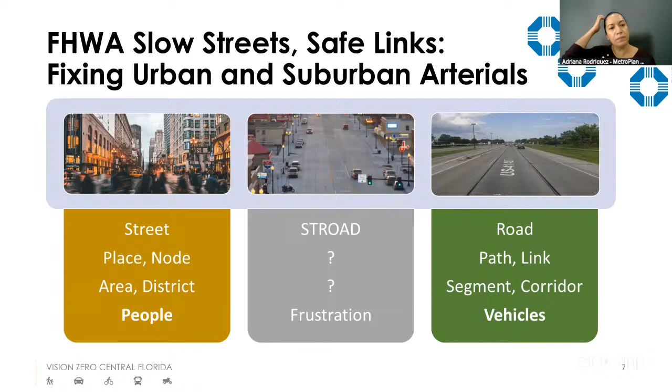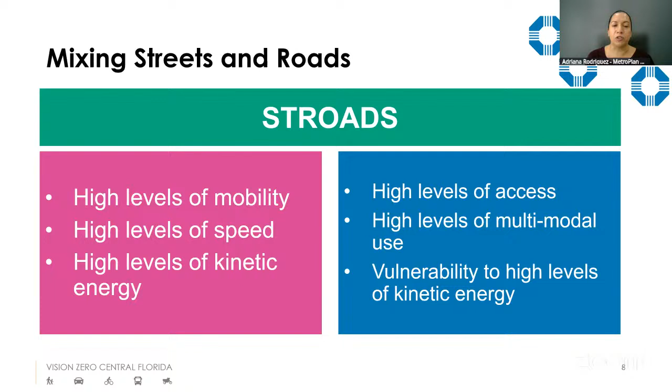So the STROADs have a high level of mobility, but also high levels of access, high levels of speed, which increases the kinetic energy, and at the same time, high levels of multimodal use, which with high speeds increases the vulnerability to those high levels of kinetic energy.

So what can we do about this? What can we do to fix STROADs? First, we can take a look at policies and standards and implement complete streets and safe system speeds policies. Also, based on data analysis, prioritize methods to help focus on these STROADs. In terms of traffic operations and signals, implementing pedestrian and bicycle improvements, as well as strategies to manage conflicts with turning vehicles. And those, again, taking a look at incremental improvements, applying quick build methods, and implementing pilot projects or phased projects can be opportunities to start improving those STROADs.

Okay, so as mentioned before, the FHWA Safe Systems Approach project framework provides new resources for measuring and prioritizing the safe systems approach. When we were developing the regional and local safety plans, these principles were applied to our methods of developing the plans. However, these are resources that are available to you as you advance or implement your plans and your actions.

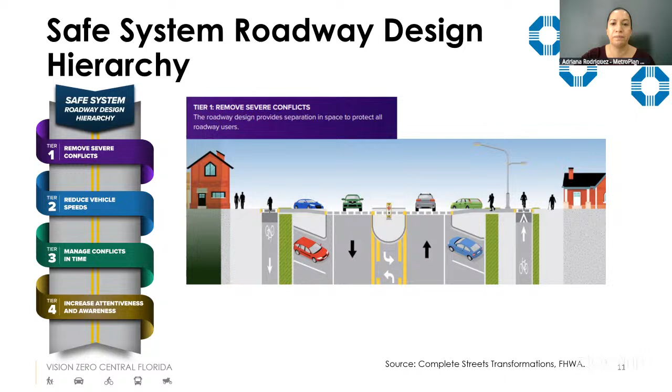Tier 1 includes countermeasures that remove severe conflicts. Tier 2 includes countermeasures that help reduce vehicle speeds. Tier 3 includes countermeasures to help manage conflicts in time. And tier 4 includes countermeasures to increase attentiveness and awareness.

So this safe system roadway design hierarchy intends to combine countermeasures and strategies across these multiple tiers to get the most efficient, most effective approach to implement safety improvements.

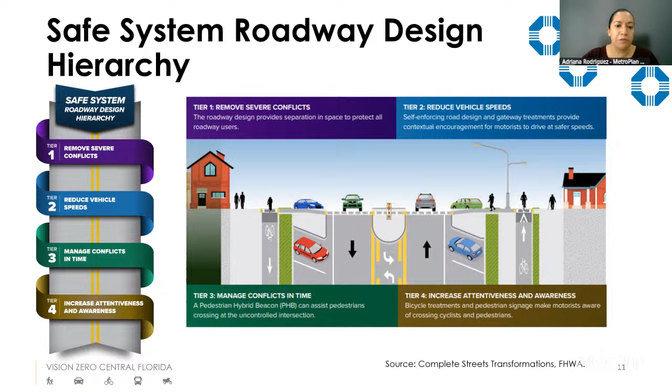Okay, so our next resource is the policy-based alignment framework. This framework can be used in multiple ways. It can be a method to benchmark and track progress towards improving the safe system alignment of the policies in place.

It can also help raise the level of awareness of safe system related practices. It can help identify gaps in existing policy and program efforts. And it can also help generate strategies to improve the safe system alignment in current practices.

Now, it is important to know that the goal of this tool is not to compare between policies. It is more to provide a roadmap for agencies that are looking to better align their policies with the safe systems approach.

Okay, and the last resource we are discussing is the project-based alignment framework tool. This tool accounts for four different sets of factors, including exposure, crash likelihood, and crash severity, as well as safety prompts and questionnaires to help identify approaches to implement safe users, safe vehicles, and better post-crash care.

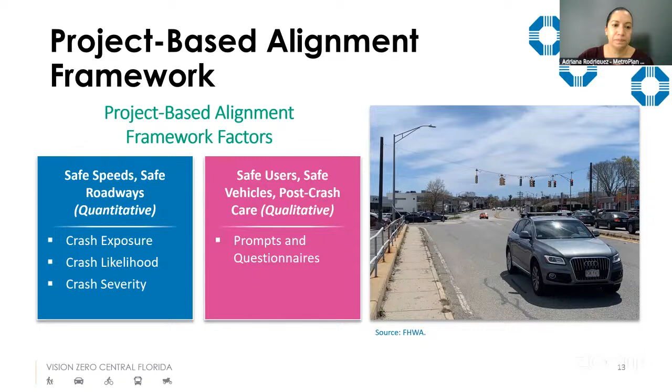Okay, so this project-based alignment framework tool is an Excel tool that provides a means to compare potential improvements among each other and with the existing conditions.

The way this tool is applied: first, it is used to obtain a score for the existing conditions of the roadway. Then the same tool is used to obtain a score for each of the proposed alternatives, which can include multiple countermeasures from the different tiers we looked at before.

Once we obtain those scores, we can compare among alternatives against the existing conditions to see which one gives us the lowest score. The lower the score, the more the alternative is in alignment with the safe system approach.

Real quick, I'm going to share the Excel tool. It is available to download for free at the FHWA website. It provides clear instructions on how to use the tool, and some definitions that are helpful to understand some of the questions.

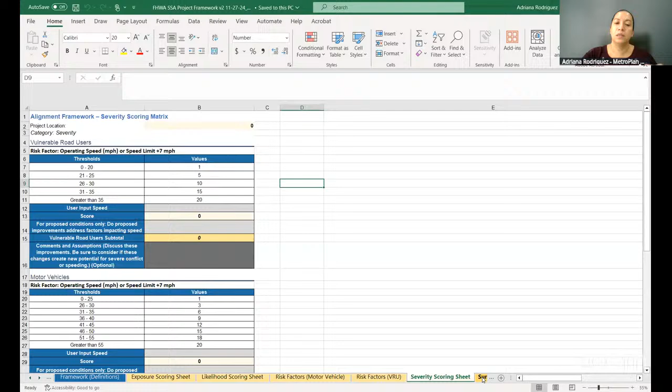These are all the tabs used to insert information about existing conditions and the proposed alternatives to get a final scoring matrix. This final scoring matrix provides the total score.

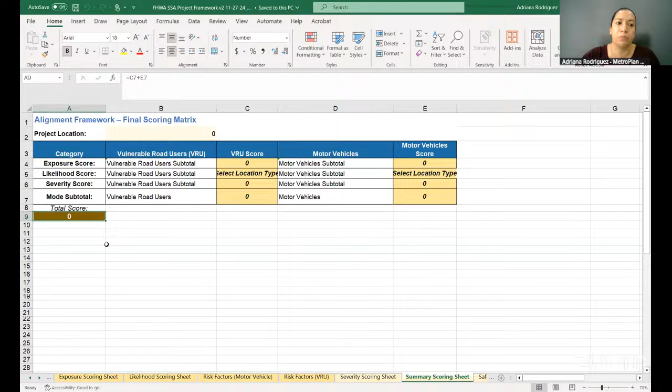Once you obtain the score for the existing conditions, the alternatives are incorporated to obtain the total score for the alternatives, which can be compared to identify the one that provides the lowest score compared to the existing conditions score. Lastly, it also provides qualitative questions that can help identify improvements needed for safety elements related to road users, vehicles, and post-crash care.

Now going back to the presentation, Mike, next slide, please.

Are you seeing the—you need to change the view back to. Yep. All right, looks like we're back. Okay, yes, okay, next slide.

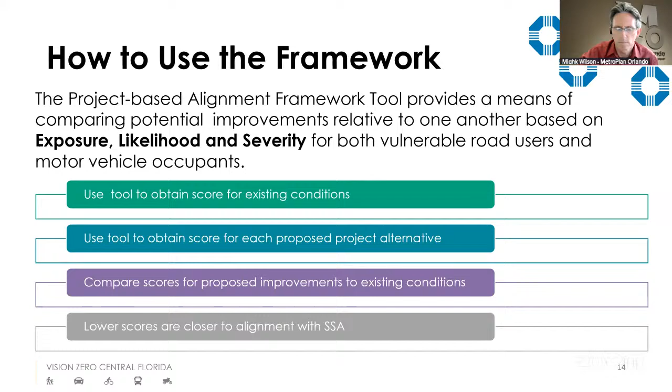We know that the project-based alignment framework, the Excel sheet we just reviewed, will be improved as FHWA staff go through trainings and get feedback to make sure they improve this tool. So it's important to keep checking for any updates they may publish.

And with that, that's my presentation. I'm happy to answer any questions you may have.

All right, I don't think I see any hands or comments, so... Okay, I have something to add. Sorry, I was looking for the hand raise tool, couldn't find it as quick as I found the unmute.

So I just wanted to share that we have used the policy-based alignment framework tool for our current proposed growth management plan updates at the City of Orlando. The tools are a little wonky when you first get in them, but once we got our footing in it, amazing resource. It provided a really good third-party perspective on our growth management plan objectives and goals, and very easy, actionable ways to update them so that it is more literally aligned with the safe systems. So I found the policy-based framework really helpful.

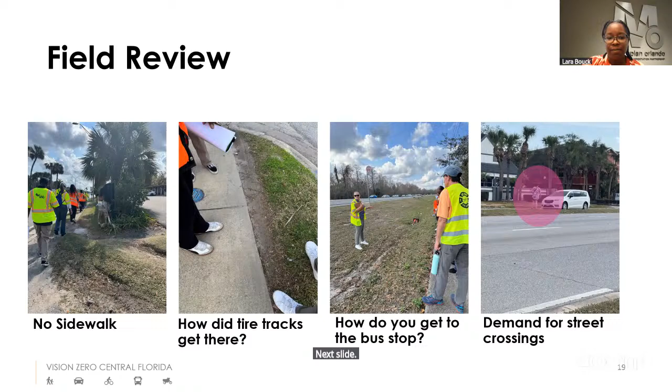And then under the model for the 8-step process, the presentation of these preliminary findings and recommendations is made to the roadway owner. And that representative has an opportunity to ask questions and seek clarification on the recommendations. And it's also a useful opportunity for the roadway owner to either suggest additional mitigation measures or to say why there are certain recommendations that likely wouldn't be taken up and why.

In the case of the training that we did, our roadway owners were out in the field with us. Actually, for Osceola County, there was some leadership that was present for that preliminary findings meeting, and so we were able to report out to them.

But as that preliminary findings meeting wraps up and you get that input from the roadway owner, the RSA team then takes that back and compiles it into a preliminary report that is then sent out to the roadway owner. In the case of the RSAs we just completed, those will be sent to us here at MetroPlan Orlando, and then we will disseminate them to the roadway owner.

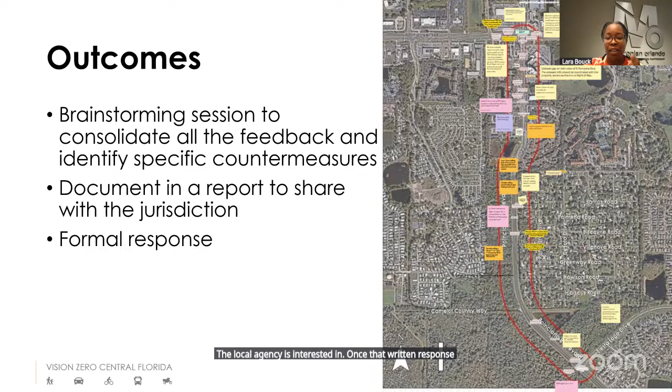And it is expected that the owner will submit a formal written response that basically talks through which recommendations will likely be pursued, which types may not be pursued, and what the issues were there, any contributing factors related to why certain improvement types would be implemented over others. And then there may be some additional ideas for other countermeasures that the local agency is interested in. Once that written response is received, then the RSA team is able to take those responses and wrap them into a final RSA report. Next slide, please.

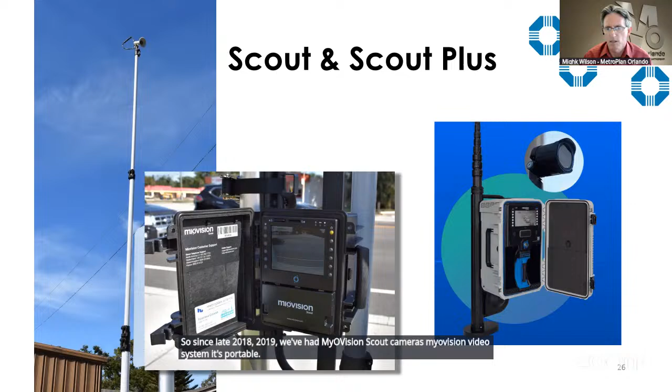I'll give you an update on what we're doing with MioVision. Since late 2018, 2019, we've had MioVision Scout cameras. The MioVision video system is portable, and after you collect the video, artificial intelligence is used to do the counts. They've since moved on to their next iteration, the Scout Plus, and we've got a couple of those.

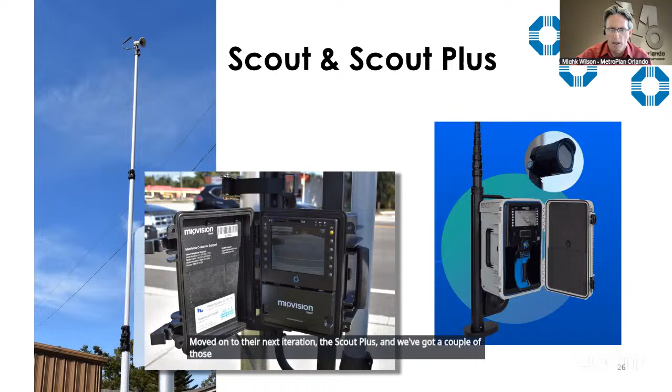From a capacity standpoint, we can do regular road volume counts, we can do non-motorist counts, you can do them together, and turning movements at intersections. They can now do near miss analysis. We used it for speed data for the RSA workshops, and they can also do counts and movements at roundabouts. The new units now have room for up to 3 batteries, and they're swappable, so you can go out in the field and swap out batteries if you want to do longer counts.

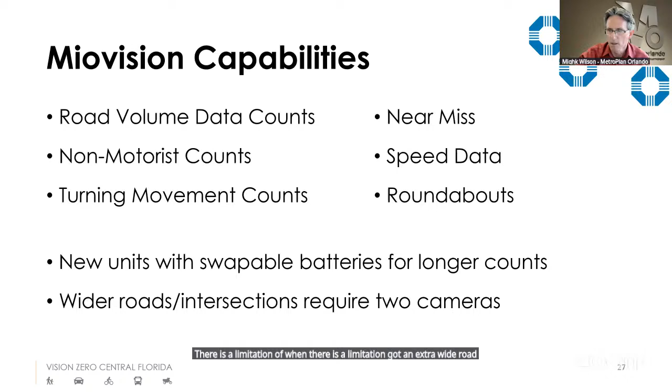Historically, we've been doing just 48-hour counts because that was the capacity of the older units. We're continuing with that, but there's opportunities to do more. There is a limitation when you've got an extra wide road or wide intersection to have 2 cameras, but we have the 2, so we can accommodate that. Historically, we've done over 100 count locations over the past 5+ years. They're all 48-hour, mostly mid-block counts.

We did a bicycle crash risk study back in 2019. We've been doing a number of baseline counts for projects where we know there's going to be a complete streets project or a side path project, so we can see what the before condition looks like. We've also been doing some trail counts on smaller trails that may not get as much attention. And we've been putting them out in different context classification areas, so we can get a better sense of how context classification influences pedestrian and bicycle travel, how that relates to type of accommodation, and what the nature of the road experience is as well.

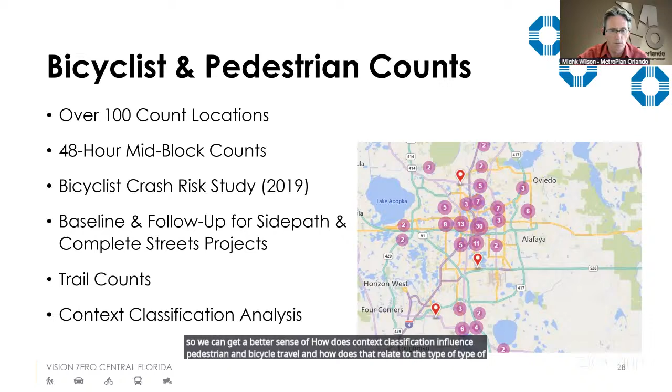And I mentioned the baseline counts. So we're looking for if you have more opportunities out there. This is what we've currently either done a baseline for, or that we're planning to do a baseline. No worries if you can't read it all, or if you don't spot yours. But if you think you have one that we might be interested in, just shoot me an email.

We've got some time this year in our calendar to do some more deployments. Typically, what we like to do deployment-wise is from January through June. After that, you're too much into the thunderstorm season, and then hurricane season, and then the holidays. So the first half of the year is better for doing our counts.

But happy to take any questions that anyone has about Miovision. Like I said, if you have a specific request for a particular count location, just shoot me an email, and we could talk about that and how to make that work.

I don't see any hands. All right, not seeing any either. All right, well, thank you.

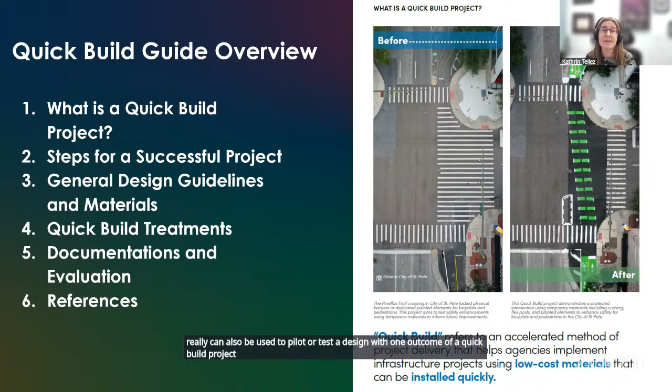Quick build projects typically do not require or include relocation of curbs or utilities, and they really can also be used to pilot or test a design, with one outcome of a quick build project being a more permanent design. Next slide.

We've identified 4 key steps for a successful quick build project, including identifying potential projects within the community, reviewing potential projects with appropriate internal departments, and then identifying a project champion. As I mentioned before, this document is intended to serve as inspiration for all the different quick build types, and it also includes some connections to different safety issues to help you identify what might be most appropriate.

So once there's an idea for a project, the planning begins, which can include the development of design plans, an implementation plan, and then also identifying how project success will be determined. In the planning phase, also identifying how the improvement will be constructed is critical.

There are some communities where new signs and pavement markings can be installed by your own staff. Those communities might be able to get a lot of different things done, whereas in other communities, if you have to hire a contractor to do everything, it might not be quite as much of a quick build process.

So once the project has been designed and the construction mechanism determined, it's time to build it. In some communities, stakeholders and community artists are invited to take part in the installation, while in others, it's really just done by the contractors or city staff.

As part of building a project, a maintenance schedule should also be identified, as well as a process for removing the treatment if, based on the data analysis and feedback from the community, it didn't quite go as well as planned. Next slide.

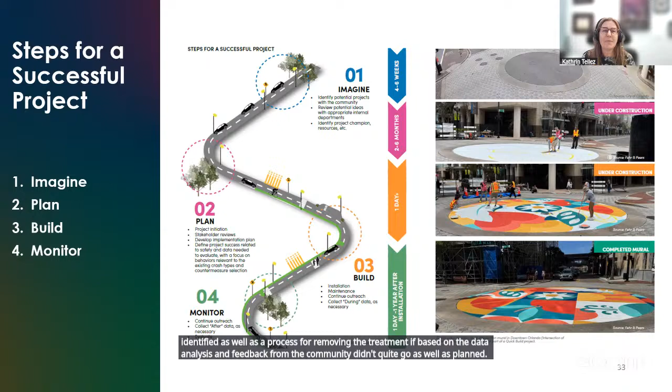The design guide also includes some general design guidelines and considerations, like emergency vehicle access, different design vehicles that you might need to think about, implementation strategies, and what might need to be included in a maintenance plan.

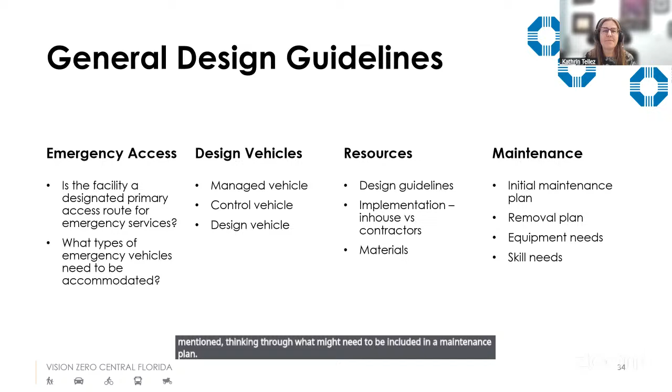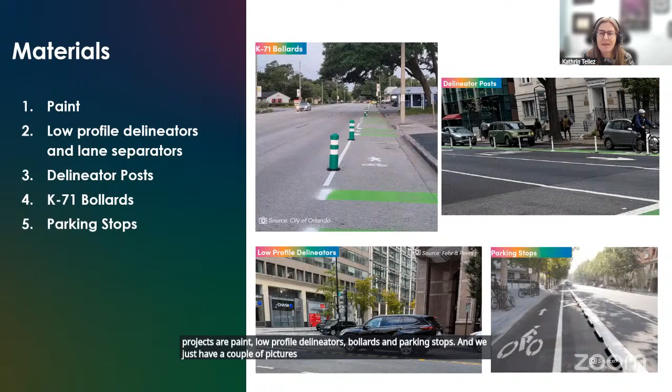The most common materials used for quick build design projects are paint, low profile delineators, bollards, and parking stops. We have a couple of pictures here so you know what we're talking about.

Other treatments include quick curb and floating transit islands, which can come as prefabricated platforms. In some jurisdictions, these can actually be moved around to different locations to test out different strategies. There are also rubberized devices like speed humps, speed cushions, and raised crosswalks. Again, some materials are intended to be piloted in a location, and if it works well, you might replace it with a permanent installation and use the temporary one elsewhere in the community. There are also pavement surface coatings that can be used.

Signs and signal modifications are also a pretty big component of quick build projects.

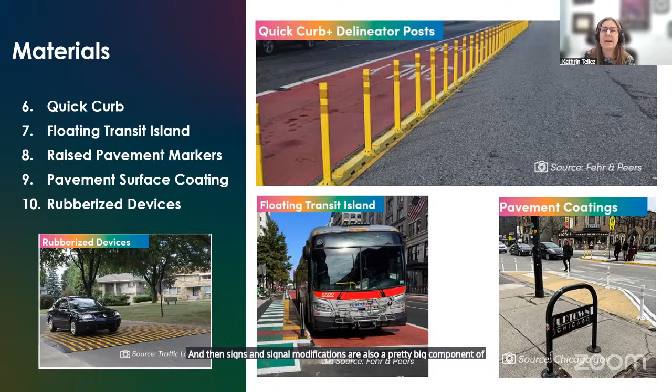For each of the common quick build materials, the guide provides additional information related to potential uses, installation time, maintenance needs, and potential project types where you might consider those materials. Each project is located in a unique setting, and there are many elements that should be considered in the selection of materials.

For example, with low profile delineators, placement should not obstruct an ADA path of travel, and aesthetics might also be a consideration. Some materials could pose new safety hazards - for example, these low profile delineators could cause a trip hazard for pedestrians depending on pedestrian travel patterns in the areas where they're installed. Lastly, a lot of these different materials can be combined for increased benefit.

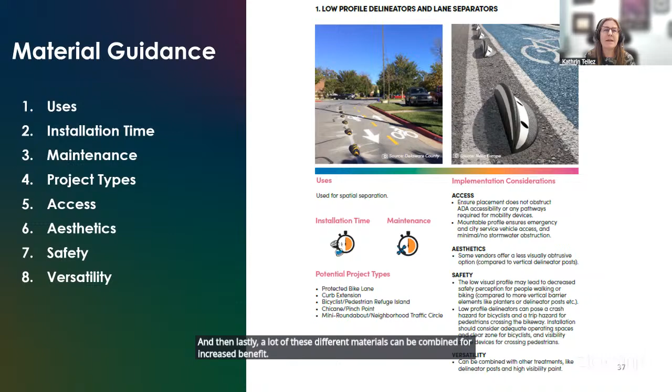Similar to the engineering toolkit, the quick build treatments are organized by different categories. Overall we have over 50 quick build treatments identified. The guide also notes if improvements are appropriate for a spot application, meaning you'd put that in at one location based on specific crash profiles, or if they're appropriate for more systemic applications, such as installing leading pedestrian intervals at all crossings within a pedestrian core. Some treatments fall under both categories.

A host of information is provided for each quick build project type, and I'll go through just a couple of examples.

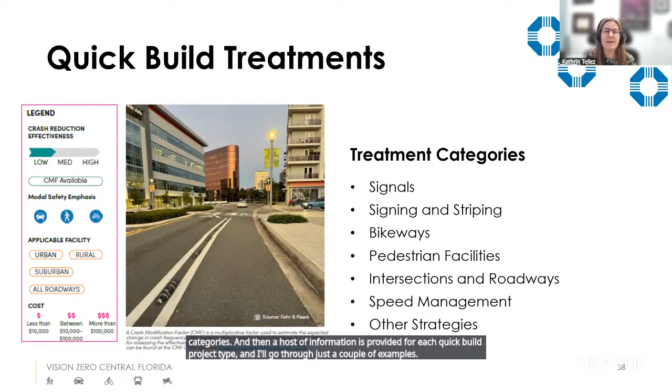For each project or quick build type, we have a definition of what the material and treatment is, the expected crash reduction effectiveness based on published data and crash modification factors from the Crash Modification Clearinghouse, the modal safety emphasis, the applicable facility types, as well as a cost range - low, medium, and high.

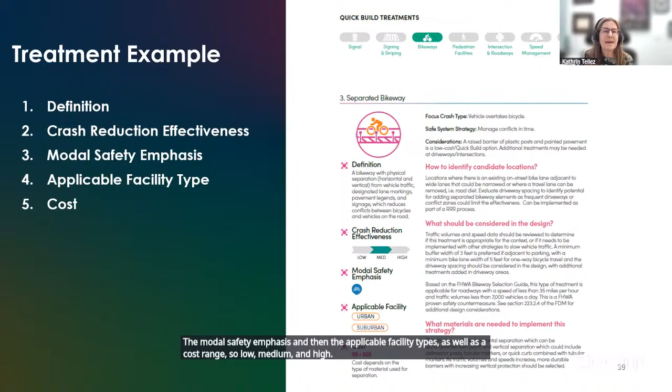A focus crash type is also provided to help pair crash patterns with treatment types, and the primary safe system strategy that Adriana mentioned earlier is tied to that as well, along with whether you might want to consider pairing the treatment with other strategies.

In some communities, potential locations for quick build projects may have already been identified through a different planning process. In others, you might need to do a bit more analysis to identify appropriate locations, so we've added some of those considerations. We've also included a list of typical materials, so if all you have budget for is paint and maybe a few signs, you can scan through the quick build guide and figure out what strategies might be within your budget.

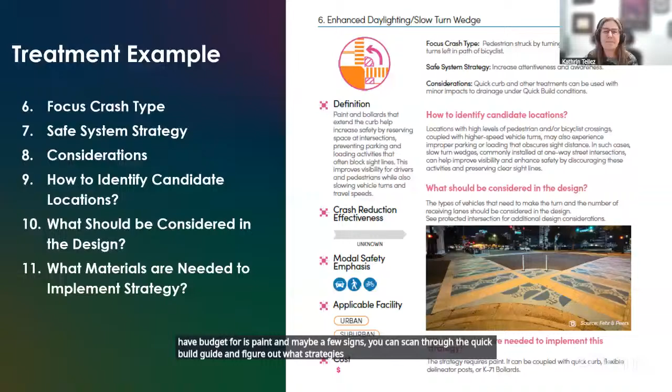A key component of the quick build program is really the evaluation and engagement piece. Understanding how the treatment has contributed to improved safety outcomes and changed roadway user behavior is key to building and maintaining community and political support, and without that it might be hard to get additional projects implemented.

The evaluation section includes some proxy metrics that can be gathered more quickly after a quick build installation, rather than waiting 3 or 5 years for new crash data. Some examples include looking at near miss data, driver speed, yielding rates, and other observations of road user behaviors, like the number of people who might cross within a marked crossing area if you're constructing a new one as part of the quick build.

So there's a lot of great information there in the guide - this is just a brief overview. Happy to answer any questions before we turn it over to Laura, who's going to share how it's all being done in Orlando.

I don't see any hands. Thank you, Kathrin. All right, take it away, Laura.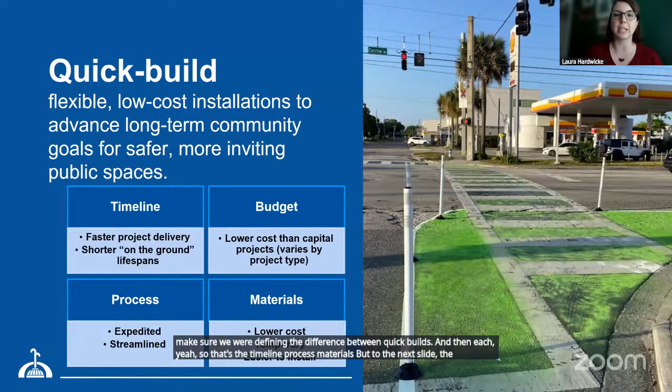When we crafted our guide, there were four main categories we needed to define the difference between quick builds: timeline, process, materials, and, most importantly, the goals for each project. If we were going to embark on a quick build, we need to identify at least one of these goals. Once you select the goal, it opens up the rest of the process for you. For the City of Orlando, our evaluation is organized into these different goals, and the materials and project types are all organized under these goals.

I'll go through a couple projects that we have done. It depends on how you count a quick build project, how many we've done in the city. We've done, I believe at this point, every level of project from demonstration to pilot to rapid. I've also found it helpful to take a project through each of these levels, especially if it's a big change for a community — it helps to ease into it. That's what we did with the Corrine pilot path.

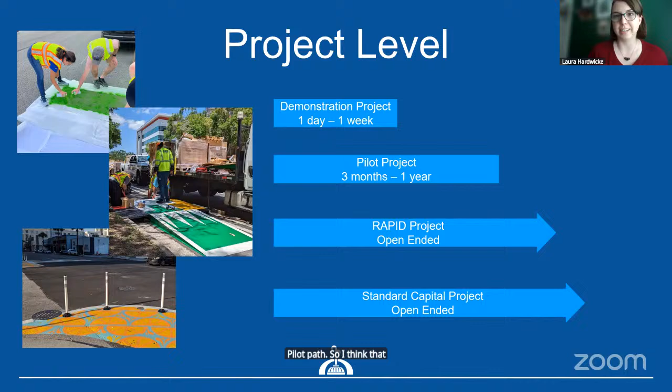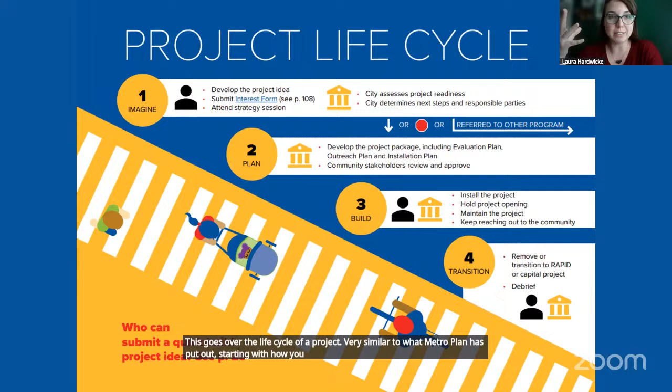I think that is the next slide. This goes over the life cycle of a project, very similar to what MetroPlan has put out, starting with how and where the idea for a quick build happens. One important thing about the City of Orlando's guide is...

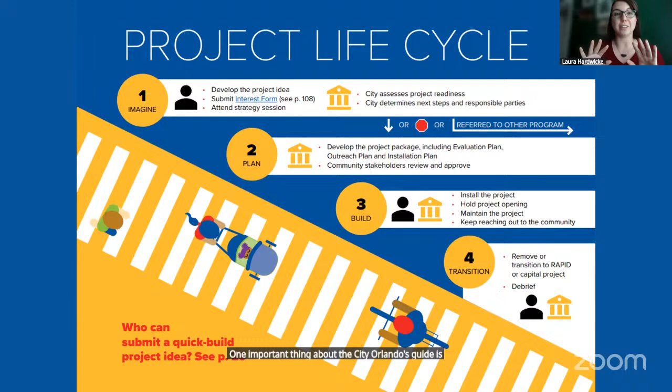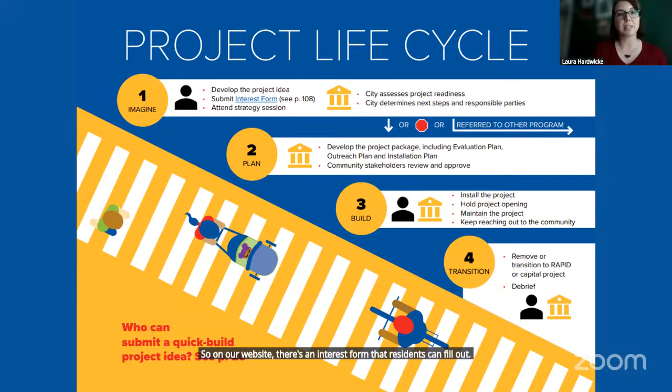it is a combination of city-led and potentially community-led quick builds. We wanted to open up this process for our community to tell us where they would want quick builds. On our website there's an interest form that residents can fill out, and it has them select their goal and drop a pin on a map, or tell us where they have an issue and what goal they want. Then it comes to city staff, and we screen it for crashes, existing projects, and all of that. If it's a good fit, we'll move it through.

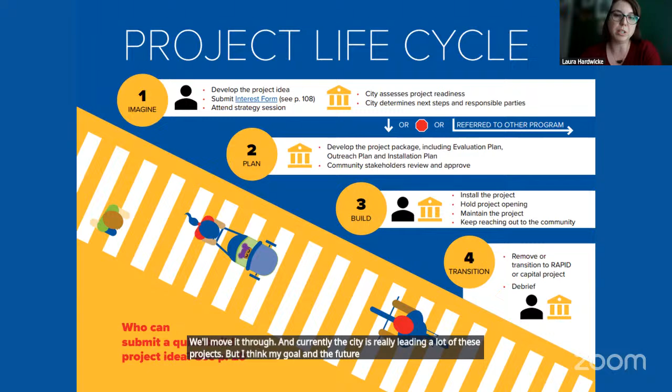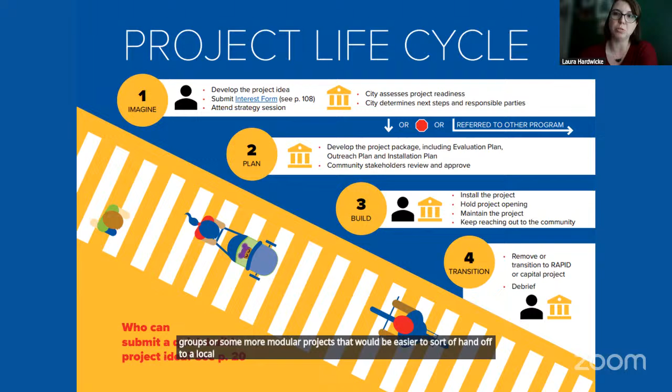Currently the city is really leading a lot of these projects, but my goal in the future would be to have some community groups, or some more modular projects that would be easier to hand off to a local school if they wanted to do some type of demonstration activity or asphalt art for their pickup drop-off, just so that we're not as limited by the resources at the city.

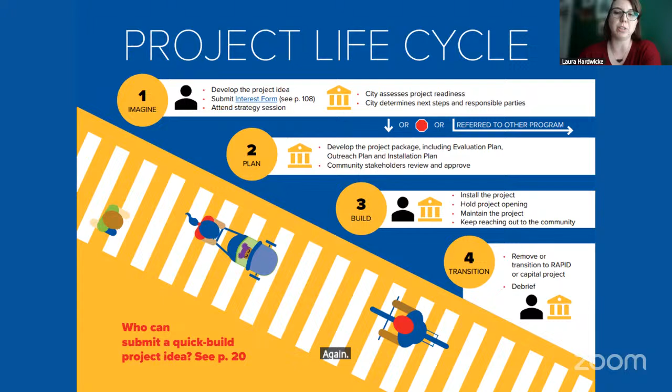Then really going into that build and transition — it's hard to say that we're going to take something out. So we're really focusing on transitioning and learning from the project while it's on the ground, making tweaks before we just say 'oh, this didn't work, we've got to start over.' Again, we saw that a lot with the Corrine pilot path, which I think is the next slide now.

Yes, finally. So we started this project as just a pop-up, which was a one-day event for Walk and Roll to School Day, where we converted an underutilized parking lane into a walking and biking path. We did that in 2022, and then we did it again in 2023.

And the mayor said, let's make this more permanent. So then we graduated to a pilot path, and in doing so we had to tweak the design a little bit. For the events, we had people walk at the driveways and some of the local streets, making sure the kids were looking both ways and that cars were waiting for the big swaths of children. Going into a pilot path where people aren't going to be out on the streets 24/7, we had to make changes to the design to try to encourage that attentiveness without us there.

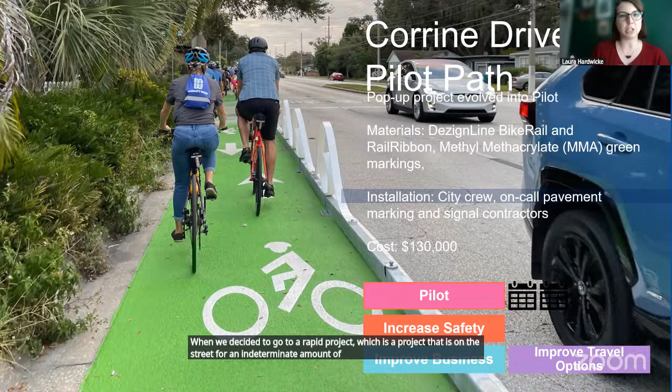And then after we discovered that the materials on the screen were not working out for us in terms of maintenance and durability, when we decided to go to a rapid project - which is a project that's on the street for an indeterminate amount of time - we changed the materials again. So we can go to the next slide.

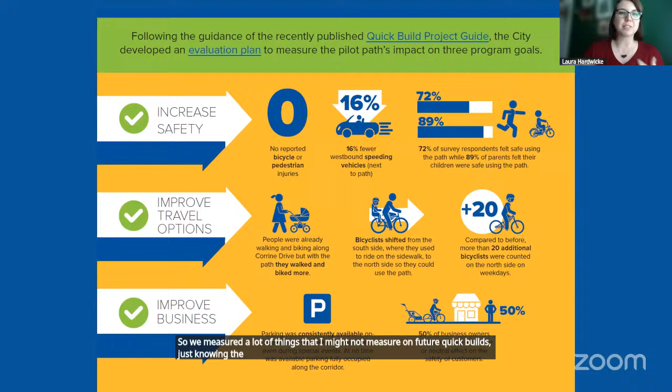This is the executive summary of our evaluation. We threw in the kitchen sink for evaluation for this project since it was one of our first. So we measured a lot of things that I might not measure on future quick builds, just knowing the shortcomings of certain data points. But for this one, it was really helpful to have it all.

My favorite thing on here is the 16% fewer speeding vehicles next to the path. I think this is a really important data point for us because we hear a lot about how on-street parking can be traffic calming, which is true. But this project shows that the separated bike lane is actually a better traffic calming element than the parking was. And we're providing space for people biking when they didn't have it before.

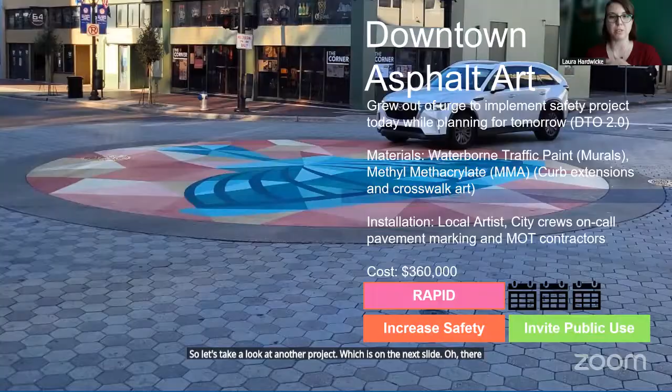So let's take a look at another project, which is on the next slide. Oh, there's the new design and sort of our what's next. So moving to the downtown asphalt art, which you saw a preview of some of these in Catherine's presentation.

And to call back to Adriana's on the safe systems approach, this was a project where we really didn't have any changes we could make to the built environment for removing severe conflicts. So we landed at that increased attentiveness with the asphalt art.

So when I'm talking about downtown asphalt art, I'm talking about these four murals on Orange Avenue, which I hope some of you all have seen since they're not far from the Metro Plan offices. I'm talking about two intersections on Orange Avenue that have artistic crosswalks and curb extensions. I think one of those is featured on the cover of Metro Plan's guide.

And then I'm also talking about all of the intersections on Rosalind where we've put out artistic crosswalks, curb extensions, and a new one - bike lane bend outs, which is the closest thing we were able to get to a protected intersection with the bike lanes on Rosalind. So that is reflected in the total costs you see on the screen for those projects. It's a lot of projects. We can go to the next slide.

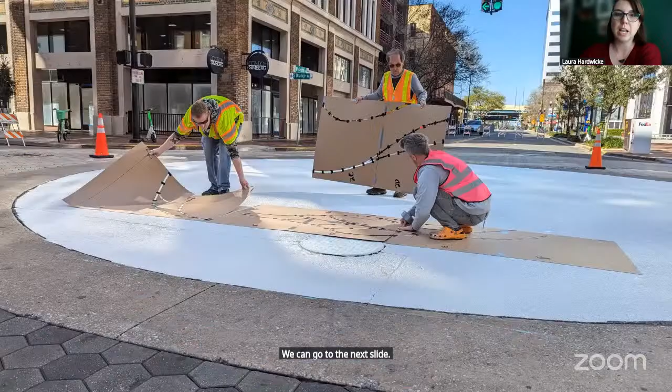I think I just got a couple pictures going through showing some of the installation process. So we use traffic paint for these murals because this road is supposed to be resurfaced and two-wayed in a shorter amount of time. So we chose a shorter material. And then we did touch these up.

So if you've got any questions about traffic paint, I can talk to you in detail about all the things I learned - when to paint, when not to paint, how many coats of paint you might need - but very nuanced with some of these materials. So having a guide like Metro Plan's can be a very helpful shortcut for us. You can go to the next slide.

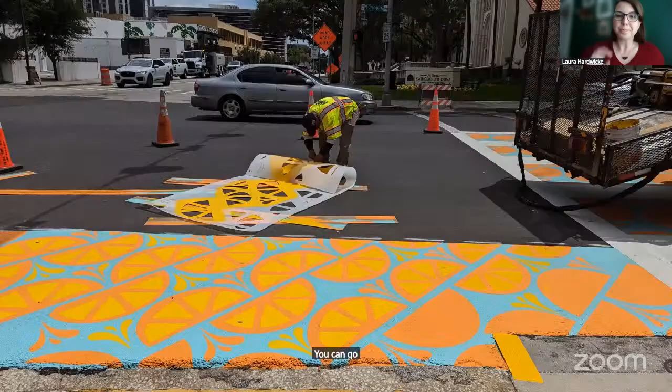This is our pavement marking contractors installing the methyl methacrylate material for the painted curb extensions and the artistic crosswalks. So this was a pretty complicated design. We usually stick to just two colors, but this one was so pretty, we allowed the three colors.

And so they essentially lay down stencils and spray the methyl methacrylate on there. You do have to do special order colors, but it's not that different of a price versus like the green bike lane because it's the same material. You can go to the next slide.

We're still in the data analysis process for this. I think you can go to the next slide, Mike.

So how are we evaluating it? We pulled these performance measures from our guide and we used Miovision. It's all coming together from the presentation today. We use our Miovision cameras to collect data before, and then we're manually processing it.

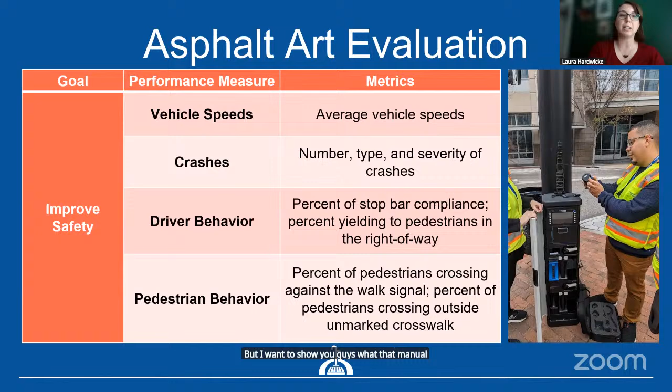If you don't have a lot of money, but you do have an intern, you can collect this data via a spreadsheet. We have to determine if an interaction is a high crash potential or a low crash potential through the video. So if you go ahead and play...

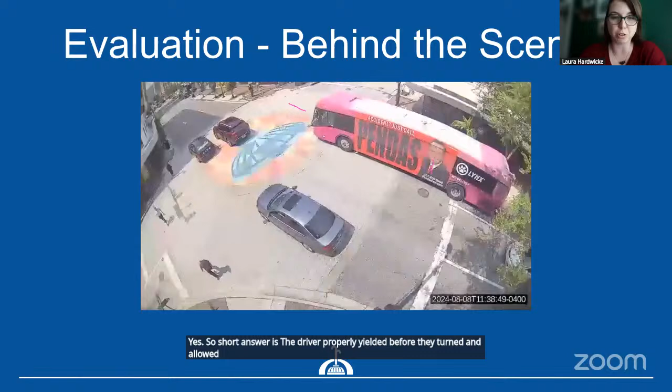So we're seeing that the asphalt art has led to, did I write that right? I think it was a 5% reduction in high crash potential interactions.

And if you press play, Mike, this one's very obvious. So it's a high crash potential. We're looking at that pedestrian right there and that vehicle that just had to swerve out of the way for them.

So we saw that these types of interactions went down about 5%, and we've only evaluated 2 of the 4 intersections.

And so I think this is really telling. It goes along with the Bloomberg asphalt art study that said they would go down 50% in ped-bike crashes. But when we're looking at near misses, you might see even more benefit through that.

So we've got the guide, we've got a couple really great projects in downtown and in our neighborhoods, but we did receive an SS4A grant to take it to the next level with our quick builds.

So we have 28 quick build sites throughout the city of Orlando that are supposed to influence our pedestrian plan for the city.

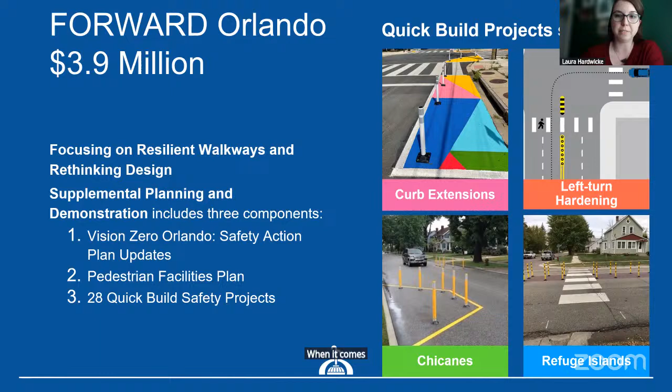So I have heard from our point of contact at Federal Highways that they're most likely going to be obligated for this section, so I'm grateful and hopeful about that.

So what we're looking at right now is bundling these. 28 is a lot, it's a big step from just a couple downtown, so we're putting them into separate buckets.

We're going to tackle the ones that we can do with city crews first, so that's going to be anything with traffic paint or just anchoring objects into the roadway, like those low profile bike lane separators. That'll be design level 1.

Design level 2 is going to be something that requires a contractor if it involves thermoplastic.

And then design level 3 is a project that might require closer roadway plans or a larger scale, or coordination with some of you on the call because it might be on an Orange County road or might involve a Lynx bus stop.

So we put those into design level 3 because they're going to take more time and more involvement. That's how we're bundling those to move forward.

I would say, in all, you could go to the next slide, Mike. The quick build guide and projects have always been a lesson to learn. If you're looking for a cookie cutter approach to things, this is not exactly the spot for it.